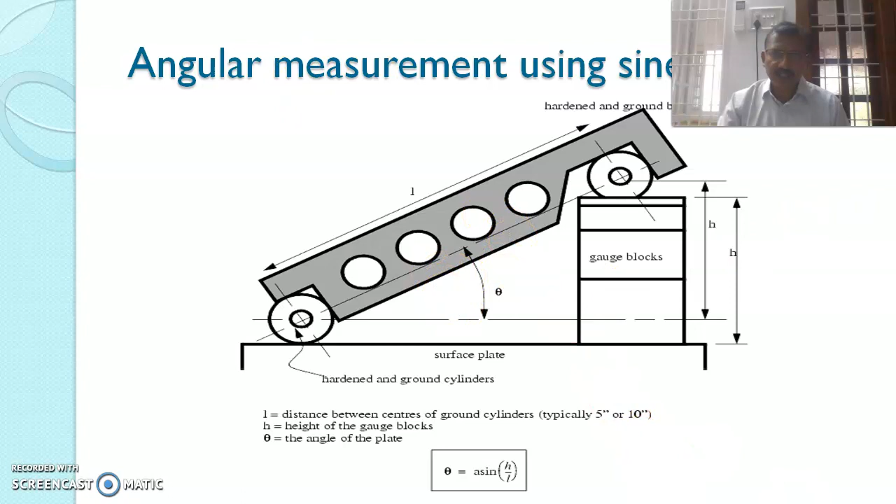Constructional features of sine bar: the two rollers must have equal diameter and be true cylinders, set parallel to each other. The center distance between the rollers is known, for example 100 mm, 200 mm, etc. It is made up of high carbon, high chromium, corrosion resistant steel.

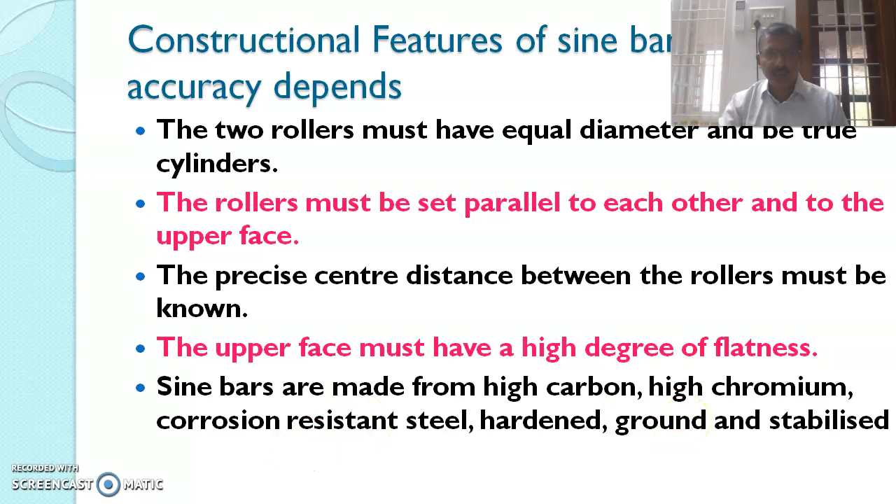In the sine bar you can measure angles from 0 to 90 degrees, but it is best suited for measuring angles up to 45 degrees. If the angle is greater than 45 degrees, error may occur in the measurement.

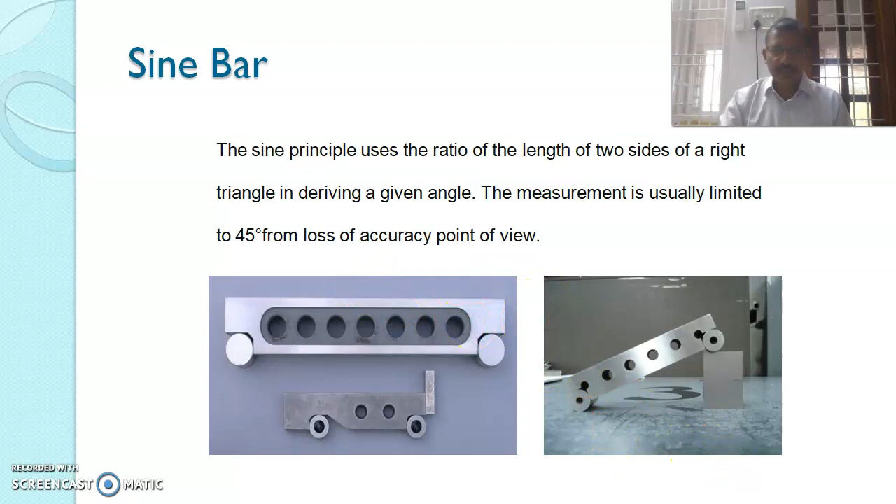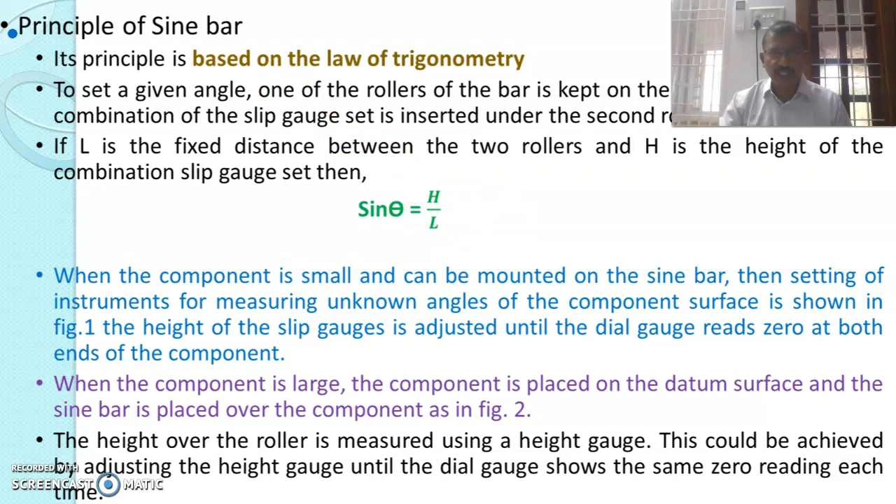Checking of unknown angles: you have to measure the angle of the workpiece. If it is a small workpiece, you can place the workpiece over the sine bar. If it is a large workpiece, you can place the sine bar over the workpiece. We'll see in the next diagram. It is a small workpiece, so we can place it over the sine bar.

Two dial indicators are placed at the two ends of the workpiece, one at each end. Then the height is adjusted. The height of the slip gauges is adjusted until the dial indicator gives a reading of 0.

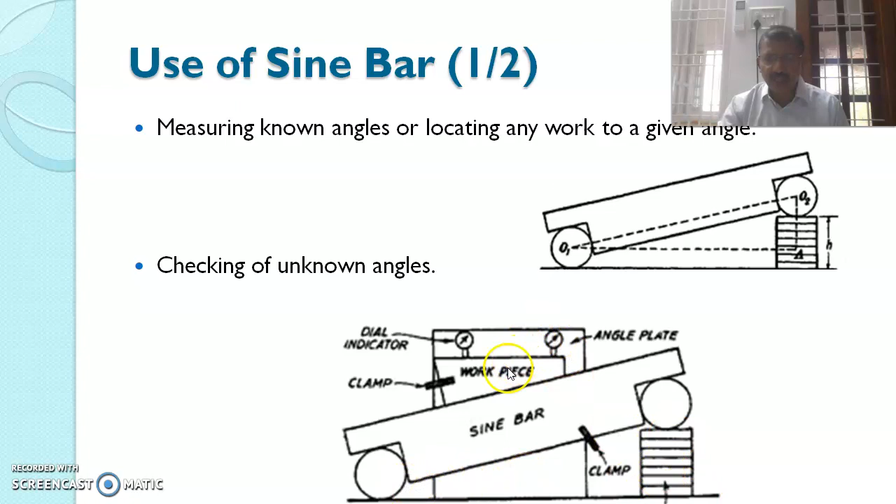You have to adjust the height of the slip gauges until both dial indicators give a reading of 0. Then, using the same sine principle, sine theta equal to h by L, you can find the angle of the workpiece, because this end and this end are parallel to each other. So the angle of the sine bar will be equal to the angle of the workpiece.

Next diagram: checking unknown angles of heavy components. If the component is very heavy, you cannot place it over the sine bar, so the sine bar is placed over the component, and these two are vernier height gauges placed at each end, and you have to measure the readings.

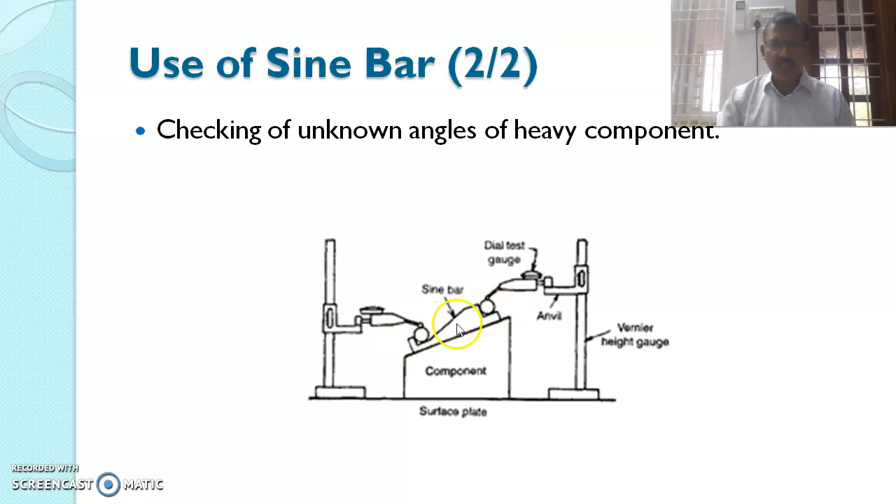In this triangle, this angle is theta, and this angle theta is equal to the angle of the component. So by knowing the distance between the rollers, you can find the angle theta.

Then, modifications of sine bar: this is called the sine center. Sine center and sine tables are the modifications of the sine bar. So the sine centers...

The sine centers are, so this is a sine bar. One end of the sine bar is hinged at one end, and at the other end you have to place the slip gauges. It is hinged. It can be moved up and down.

There is a center similar to the headstock and tailstock in a lathe. This is a conical workpiece, and you have to measure the angle of taper in this workpiece. So there is a sender called live center and dead center. Two centers are available. You have to place the workpiece in the centers and measure the height.

By adjusting the slip gauges, you can measure the angle of the workpiece using a dial. You have to set the dial reading equal to 0, and measure the angle using the height of the slip gauges and the distance between the rollers. This way you can measure the angle of taper present in the workpiece.

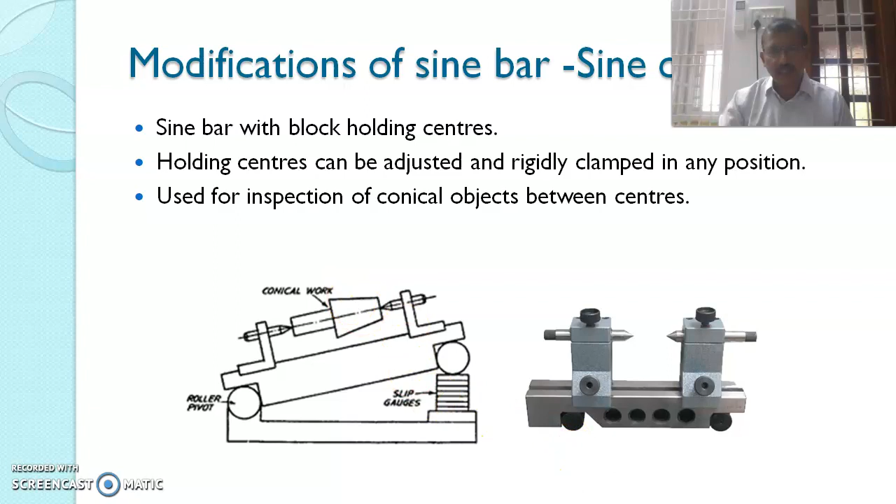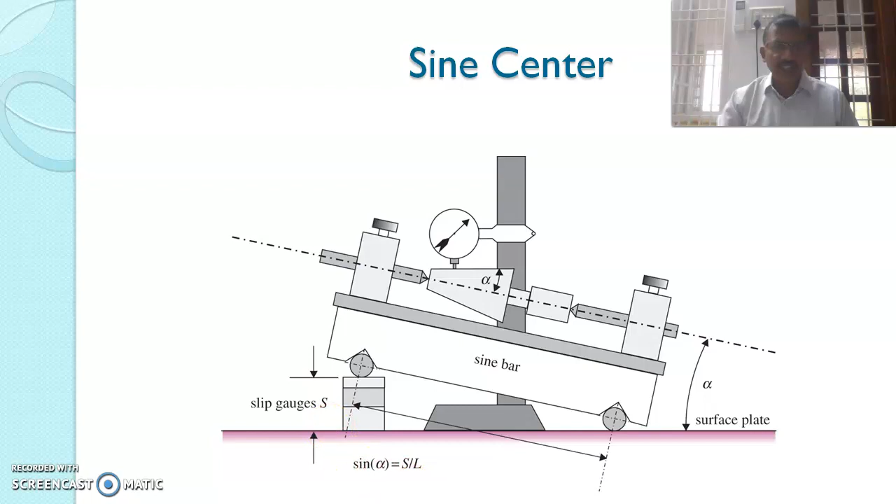So this is a diagram shown here. This is a surface plate, and this is the slip gauges and the dial reading. Here the centers, two centers are available, and the dial gauge is over that. For the 0 setting, you have to adjust the height of the slip gauges, and sin alpha equals S by L using the formula, where S is the height and L is the length between the sine bar centers. Using the height of the slip gauges, you can find the angle.

Sine center is used in situations where it is difficult to mount the components on the sine bar. It consists of a sine bar which is hinged at one roller end mounted on the datum end.

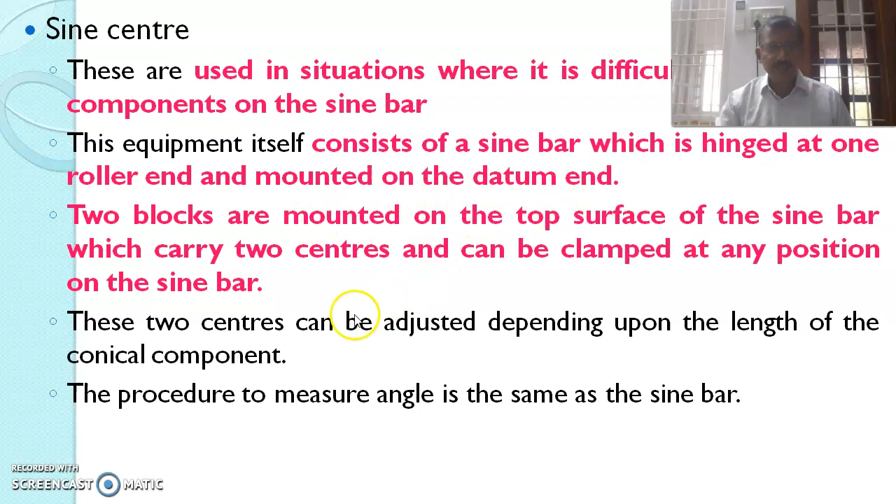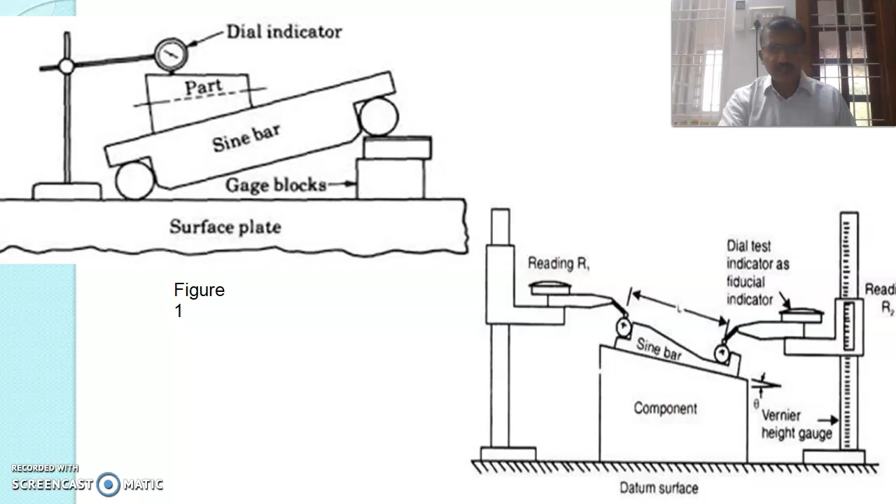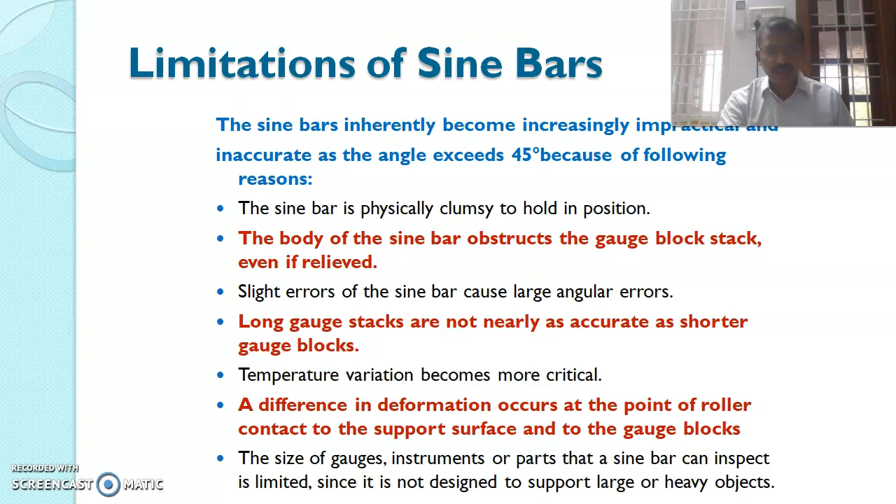Sine table is another modification of the sine bar. So this is a sine table. One end is hinged, and this can be adjusted. The height can be adjusted, and the slip gauges are stacked together to find the angle of a workpiece. So this is called a sine table.

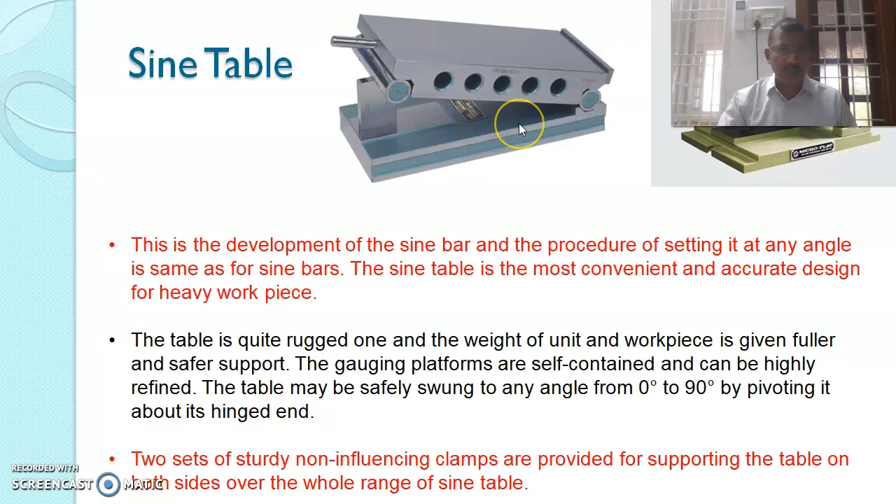Next angular measurement device is the bevel protractor. There are different types of protractor available. The ordinary protractor - this can measure, and it has a least count of 1 degree. With 1 degree accuracy we can measure angles using the protractor.

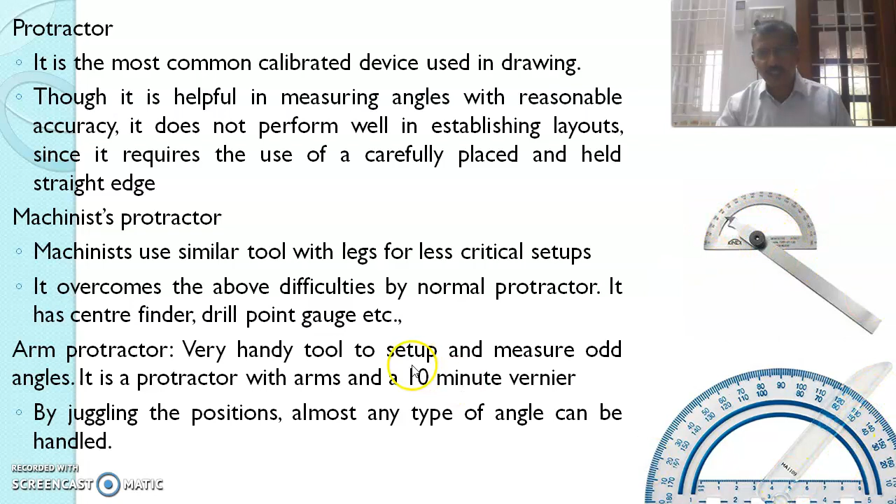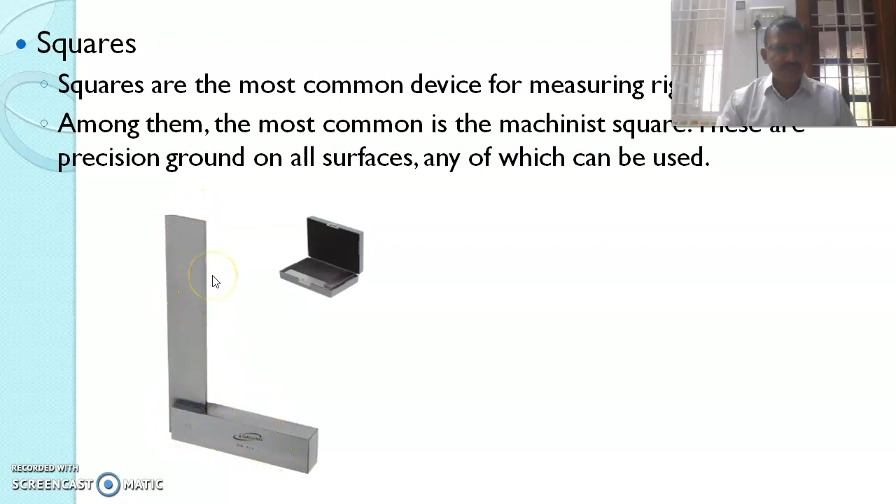Machinist protractor consists of a knob as well as a blade, and an arm protractor consists of an arm. Then squares, T squares, are called T squares. They are used in carpentry shops as well as in machine shops. They can be used to measure 90-degree right angles to each other.

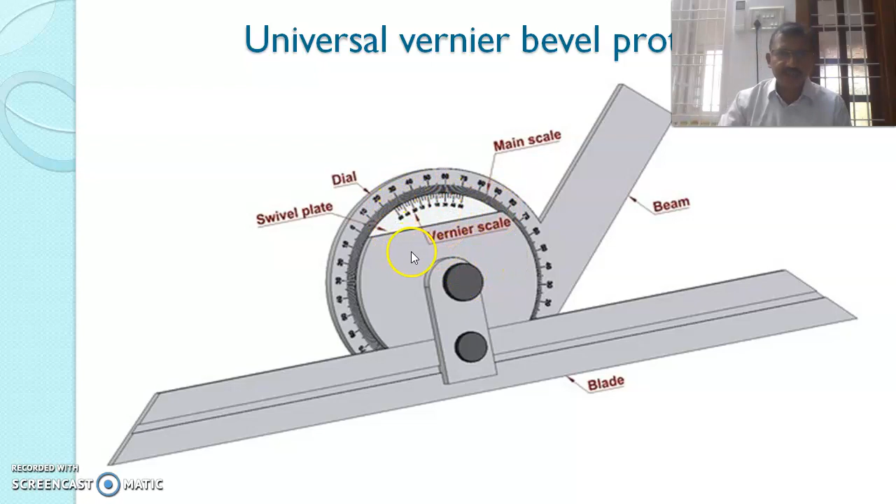Then the next protractor is the universal vernier bevel protractor. This is a blade and this is a beam, and this is the main scale, this is the vernier scale, and this is the dial. In the main scale the readings are...

The vernier bevel protractor can measure an angle to 5 minutes accuracy. Whereas an ordinary protractor has a least count of 1 degree, the universal vernier bevel protractor has a least count of 5 minutes.

This is the main scale, similar to the ordinary protractor. It starts from 0 to 90 on either side.

The vernier scale consists of a 0 and has 12 divisions on either side, ranging through 5, 10, 15, 20, 25, 30, 35, 40, 45, 50, 55, 60. So 12 divisions on either side. One degree is divided into 60 minutes on either side - 60 minutes on each side of the center 0.

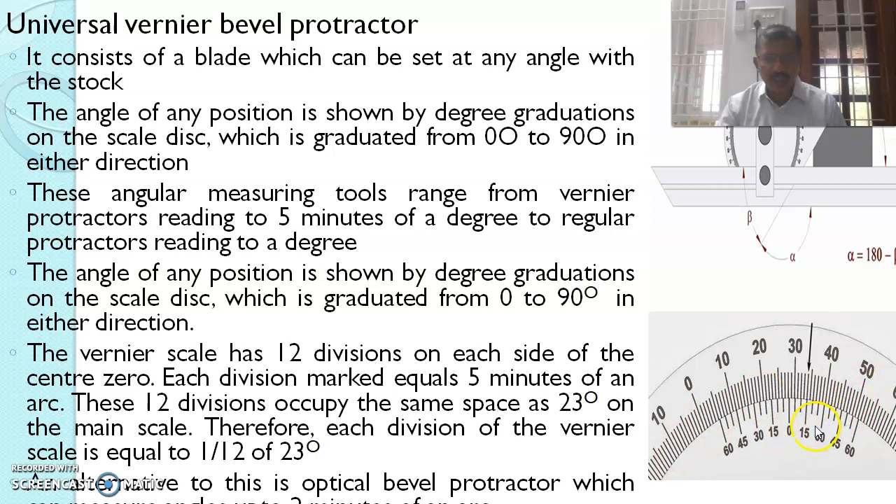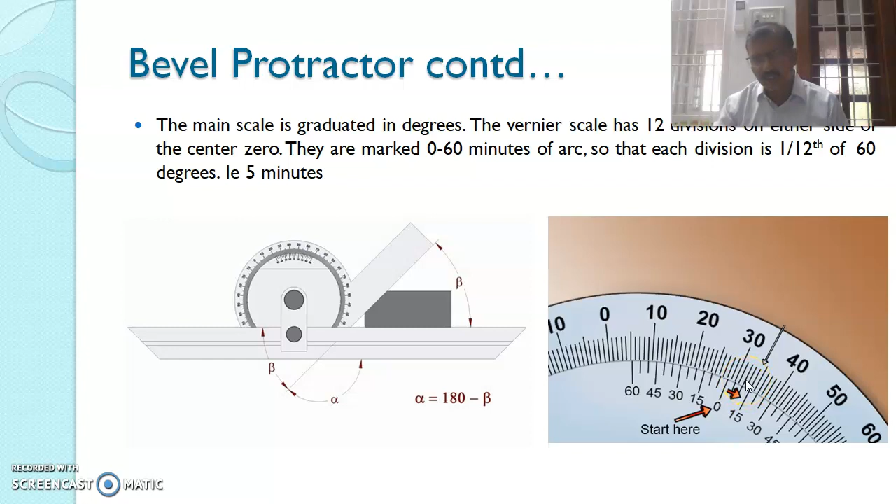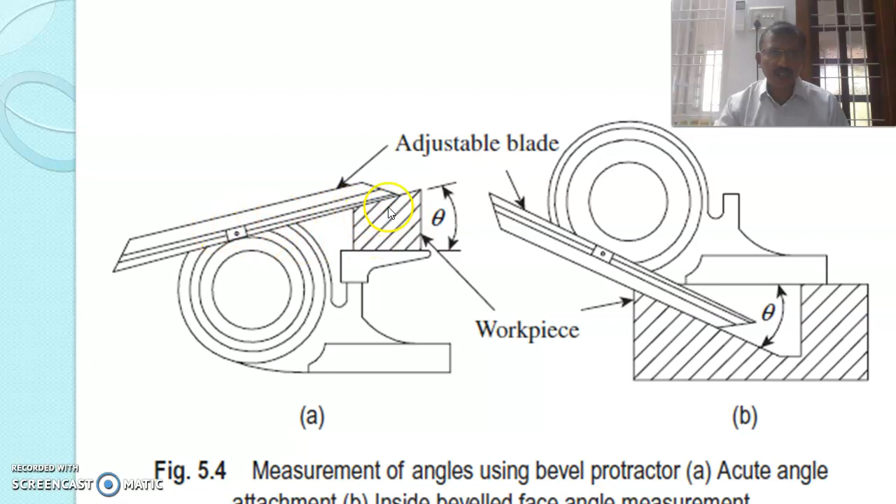Now for measurement using the vernier bevel protractor: the workpiece is placed here, the adjustable blade is adjusted, and the vernier scale readings are noted. In the first diagram, the workpiece is placed over the base plate, the adjustable blade is adjusted and set over the workpiece, and the angle is measured. Thank you.